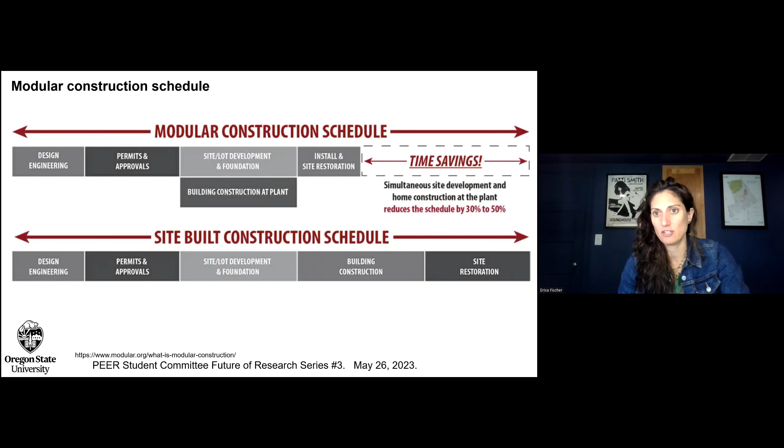And so I'm going to show you a video. This is about a minute. So right after COVID hit Wuhan, China, there was a hospital that was built within about 10 days. And it was built using modular construction. You can begin to see all the modules and the layout here. And so I wanted to show you a time-lapse video of this because I think it's pretty incredible.

When we think about construction in the United States, a lot of you are on university campuses. I'm sure you see buildings that are under construction for years. And then they build a building in 10 days. So, thinking about how we can actually increase the speed of construction and what is possible is kind of remarkable.

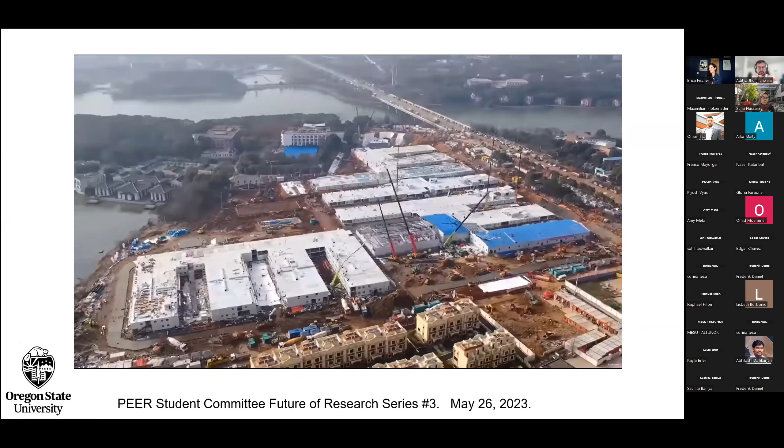Okay, so the music is kind of dramatic. But I'm not saying that all hospitals need to be built in 10 days, but I think what's incredible about this example is to show what is actually possible in our construction. That if we are able to use modular construction for certain applications, we are able to drastically increase construction, and how we could actually solve a lot of our societal problems through that increased speed of construction would be incredible.

But it's not only used for hospitals and for these emergency situations. There are a number of examples of modular buildings that have gone up all over the world, including here on the West Coast in high seismic regions. And so we are starting to see the use of modular construction for hotels, for apartments, for commercial spaces, in order to rapidly build buildings, but also to try it out and see what is the possibility of this new construction.

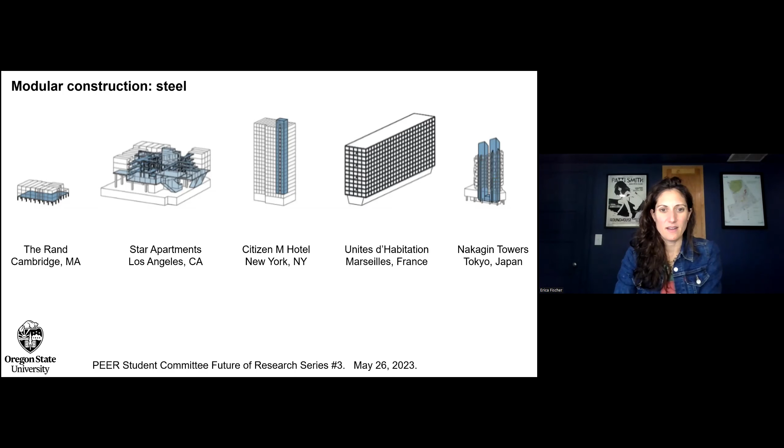The connections themselves were CNC'd offsite, so that everything can be put into place. So there's very little work occurring on the site itself, other than putting everything into place. So the mass timber itself is really primed to be used in this volumetric modular construction.

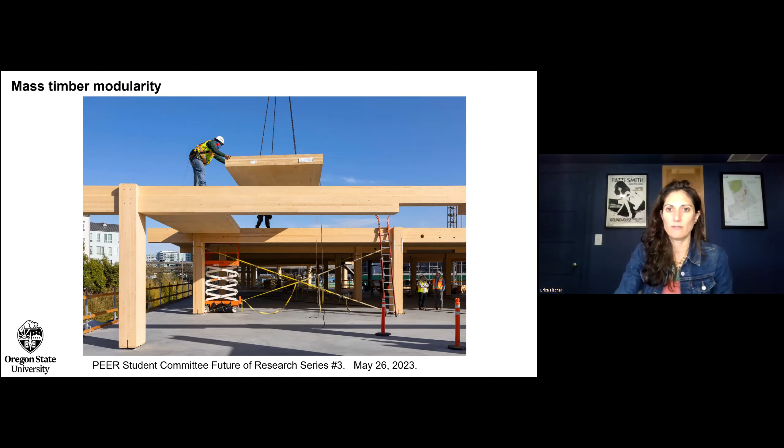and is being used throughout the country for low-rise building construction. But the project I'm about to show you that we've been working on at Oregon State University is focusing on high-rise building construction for modular construction. And so what that looks like is glulam beams and columns, as well as CLT floors. And so the modules themselves have 4 glulam columns with 8 glulam beams, 4 supporting the mass timber panel for the ceiling, and 4 supporting the mass timber panel for the floor.

And these are connected together with kind of an interstitial space between the modules where all of the utilities are run. You can imagine if these are all cubes, you need to punch holes in the walls in order to run utilities through the length of the building. And so that can be problematic if you're using your mass timber walls as lateral systems.

So in this type of configuration, there are two different types of connections. The first are the connections within the module themselves. This is an intra-module connection. And then you have the connection between the modules to connect the modules together to create either a diaphragm system or just to create continuity of load path. And that is called an intermodule connection.

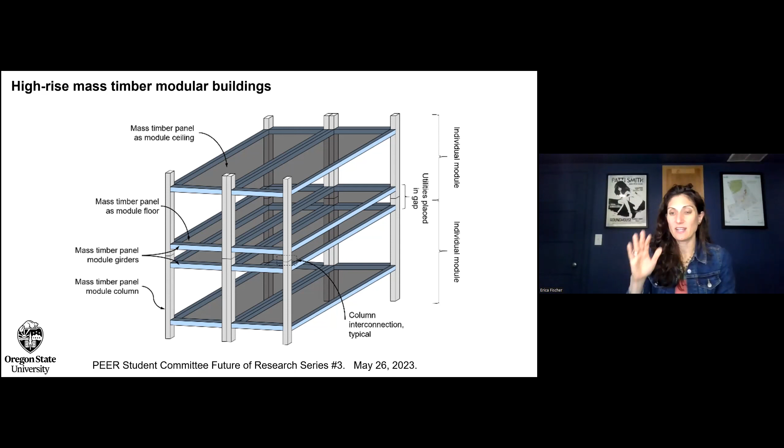And I'm going to focus a lot the rest of the presentation on these intermodule connections that connect module to module, because the behavior of the entire building itself is going to be dependent upon this connection, the stiffness of this connection, how this connection is designed, and it's really the behavior of the whole building in a seismic event.

Okay, so before I start though, I'm going to talk a little bit about what these big research challenges are with modular buildings. And so if we have this type of modular building looking at an elevation, we apply some lateral forces to it. First and foremost, we have to ask ourselves, where are the diaphragms? Are the diaphragms at the floor level? Do the ceilings themselves contribute to that diaphragm action in any capacity?

We have to ask ourselves how the stiffness of the module to module connection, or the intermodule connection, influences the behavior of the building. How does the stiffness influence the drift, the interstory drifts of the building? How does it influence the diaphragm behavior? How does it influence the accelerations that we're seeing at each of the floor levels?

And then lastly, can we use ductility and overstrength factors for regular buildings? Can we take everything we know about the seismic performance of regular buildings and apply it to the seismic performance of modular buildings? And where can we not apply it? Where do we need to develop new knowledge? And where can we take that knowledge and transfer it over?

And so I'm going to talk a bit about the first two questions, because we haven't really begun answering even all of the third question in a project that we're doing at Oregon State University. And this is just one example of a project that is happening. There is modular construction research occurring for low-rise buildings at Oregon State University as well. I'm going to be focusing on high-rise buildings.

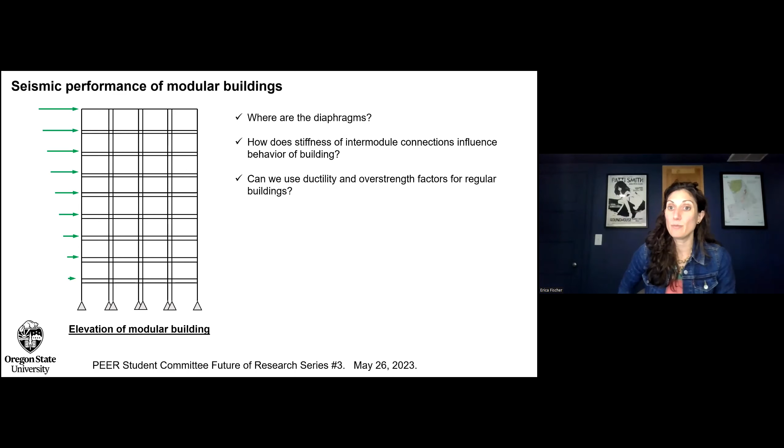And there are a lot of companies throughout the Pacific Northwest that are looking at how to make this feasible, and really mainly focusing on the panelized, kind of shipping crate construction for low-rise construction, because the knowledge is just not there yet for this high-rise construction, and what it looks like to actually have these intermodular connections, what they visually look like, as well as what kind of stiffnesses we need to meet in order to get the global building behavior that we need to meet the building code.

Okay, so I'm going to talk a little bit about the role of intermodular connections and the behavior of modular and mass timber buildings. Again, this is an ongoing project at Oregon State University. We're in the second of 5 years of this project. And I'm going to try to do the work of my graduate student justice. And I'm going to focus today on two points.

The first being the placement of these intermodular connections. Where do we put them? Do we put them at the diaphragm level? Do we put them in the interstitial space? Does that even matter on the global behavior of the building of where we put these connections? And then looking at the stiffness of these connections and how that changes the behavior of the building.

And so for this study, we looked at 3 different case study buildings, and it met the type 4A, type 4B, type 4C construction. And if you have no idea what the words that I'm saying, these are types of buildings out of the International Building Code. So the International Building Code has different types of construction that relate to the building height as well as the material that they're constructed out of. Type 1 and type 2 construction are typically steel and concrete buildings.

They're typically non-combustible buildings. Type 4 buildings used to be one category of type 4 heavy timber building that was 9 stories or 85 feet tall. And with the emergence of the 2021 International Building Code, we saw the expansion of that into these type 4A, type 4B, and type 4C. So you can go all the way up to 18 stories in a mass timber building. That doesn't mean you can go up to 18 stories fully exposed with no fire protection. As you increase in height, you need to add additional fire protection to the building, in terms of gypsum wall board, etc. But you can have a 9-story building that's almost all fully exposed in mass timber.

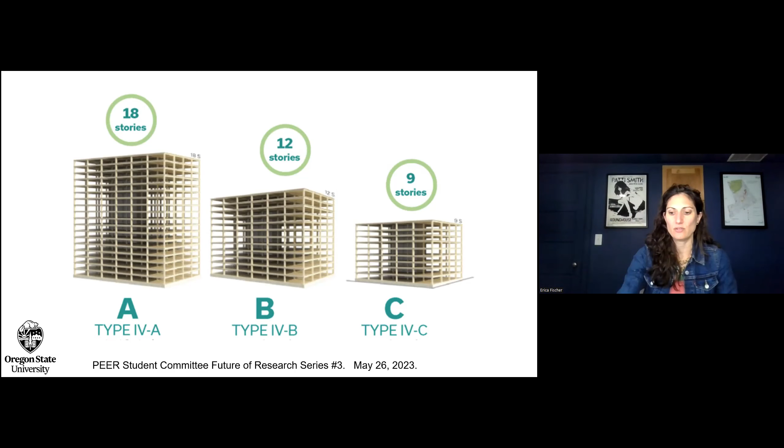And so we wanted these case study buildings to kind of match up with what is in the International Building Code. So throughout my results, I'm going to talk about the 18-story building, 12-story building, and the 9-story building, and this is why we chose those 3 buildings. The floor plan of each building looks like what I'm putting on the screen right here. This is a very similar floor plan to what the Brock Commons building is. That is an 18-story mass timber building with a reinforced concrete shear wall, two cores, similar to what I'm showing here. That is a University of British Columbia dorm.

So perfect example of where you could probably use modular construction, where every single room is basically the same, and you have this very regular pattern of the floor layout from floor to floor to floor. So we used a very similar column grid and core location to kind of mimic that building. We designed these buildings to be located in Seattle, so high seismic region. They have the site class D, risk category 2. The CLT that's on the floor level is all a 5-ply CLT, spruce pine fir.

And then because we actually found that that is where the diaphragm is, it is not at the ceiling level, and the ceiling doesn't really contribute very much to the structural performance, at least that CLT panel does not. But we do need a CLT panel there for stability during transportation. We used a 3-ply ponderosa pine for that CLT panel. The ponderosa pine is a product of forest restoration. So when you're doing wildfire mitigation, particularly in the Pacific Northwest, we are removing a lot of ponderosa pine from the forest.

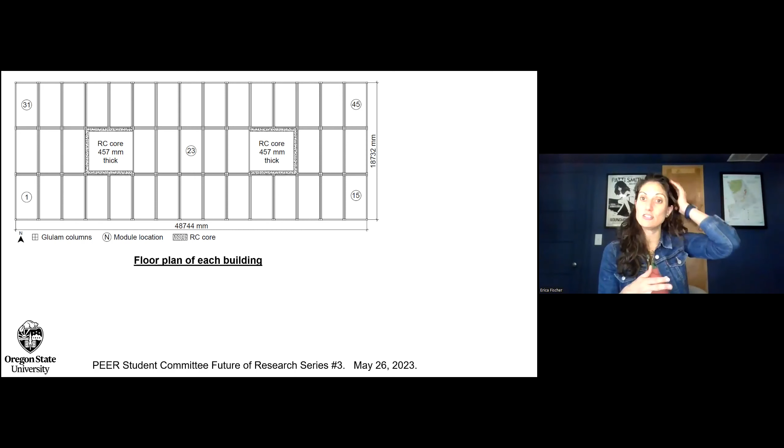And a question that we as an engineering community are having is, can we actually use that? It's a low grade lumber, but can we use it in some sort of capacity so we're not just throwing it in the garbage? And it turns out we can use it in CLT for certain applications, and we're highlighting one of these applications here. In this building, we used 10 pounds per square foot superimposed dead load on every single floor and 50 pounds per square foot live load on every single floor. And all of the building components were modeled using elastic uniaxial materials, and I'll get to the reasons for that in a little bit.

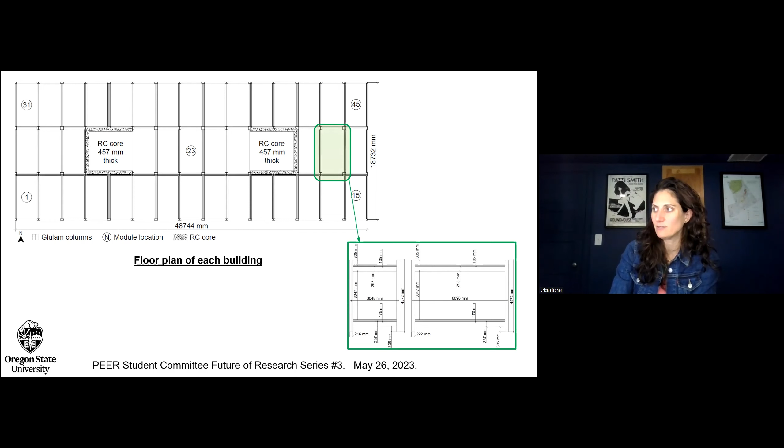Each of the individual modules can look like this, as I'm showing here, with dimensions, and these were designed for gravity loads as well as for seismic loads using the equivalent lateral force procedure, and then checked for forces using our OpenSees model. And so what the connections look like is that they are 2-node zero-length elements. So I'm not really showing them as zero length here, but they are zero length.

And so we looked at what happens when we actually put the connection at the diaphragm level. So this is when the connection's at the floor beam and diaphragm level. And then what happens when we put them in the interstitial space? What happens when we put that connection at the intersection of the columns itself? And how does that influence the global behavior of the building, right?

So if we're going to design these module-to-module connections, where do we put the connection? And how do we choose that location such that we're minimizing forces in the connection, we're efficiently designing the building such that we're using less material than we have to?

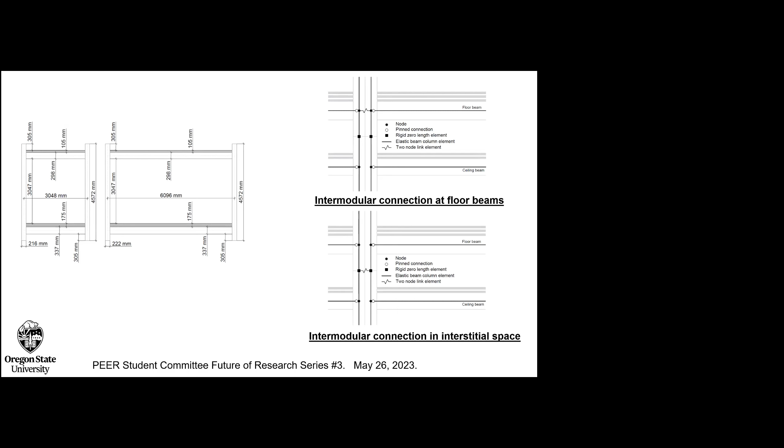Each module itself was designed and modeled such that each individual diaphragm in the module was assigned a rigid diaphragm constraint. But then we looked at what would happen to the full floor diaphragm by putting the two-node link elements at these different locations, and then by also changing that translational degree of freedom stiffness, how does that change the definition of the diaphragm itself in terms of rigid, semi-rigid, or flexible?

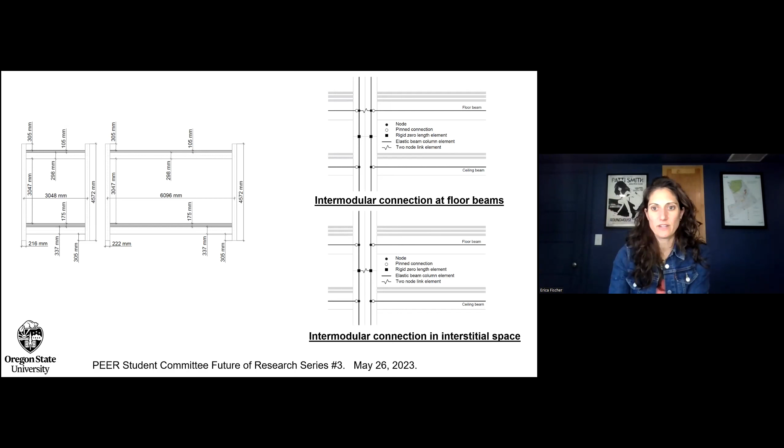Okay, so what we found, I'm going to go through some of the results. First and foremost, we found that there are smaller interstory drifts. So when we actually put the connection at the floor beam level, at that diaphragm level, we saw that there are less interstory drifts than at that intersection of where the columns meet one another. We also saw that the location of the maximum interstory drift changed.

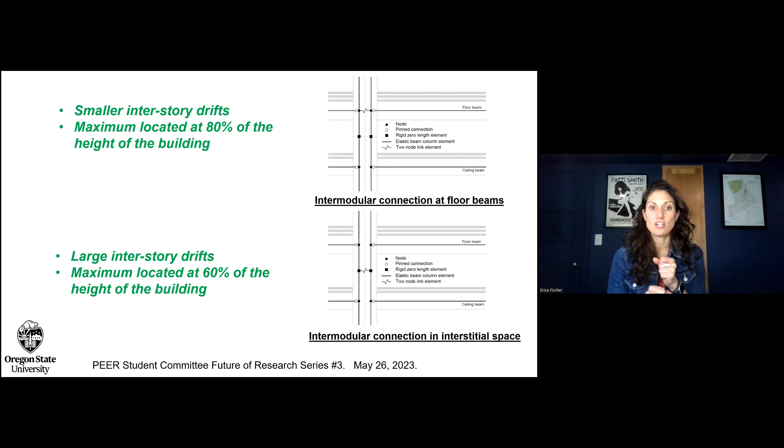In all of the buildings, all of the interstory drifts were below 1.5%. So they definitely met code requirements. And our reinforced concrete shear walls were actually designed to limit the drift of the building. But we are beginning to see that intermodular connections and their location can actually influence the global behavior of the building.

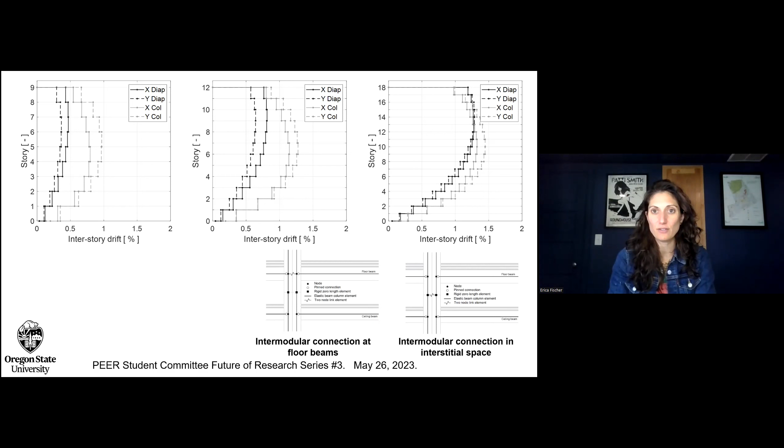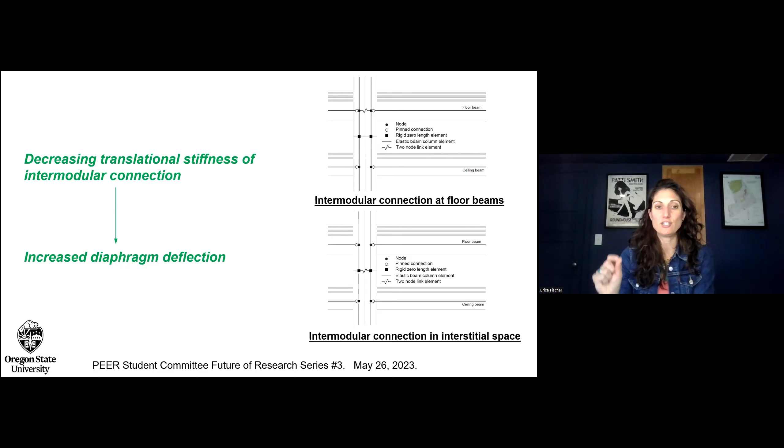Okay, so if we want to begin changing the stiffness of the intermodular connection: as we begin to decrease the stiffness, we begin to increase the diaphragm deflection, which would make sense. We begin to see that the floor level behaves more like a flexible diaphragm as we decrease the translational stiffness of these connections. And that's regardless of where we put these connections, whether in that interstitial space between the two column locations, or at the diaphragm level.

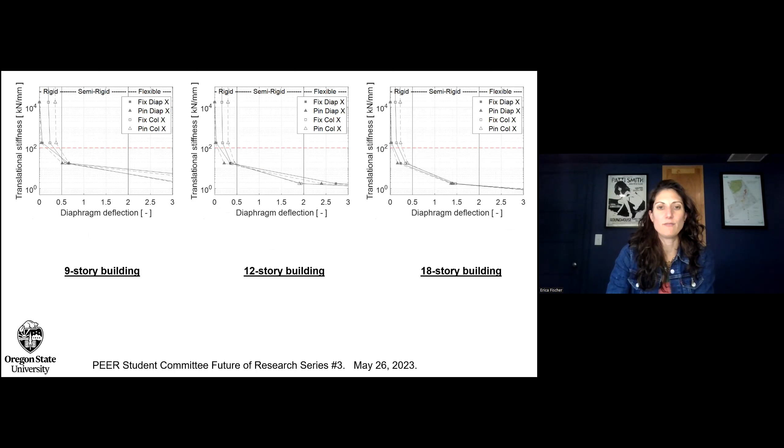And so as we continue to look at different metrics, we also looked at what happens if we change the rotational stiffness, and we really don't see much difference if we are changing the rotational stiffness here. What I'm showing you here is pinned versus fixed rotational stiffness, so allowing infinite rotation versus allowing no rotation. And we can see that the lines are pretty much the same.

We don't see as much of a difference between these two as we might in some of the other plots that I've shown you here, where we've seen a large impact on the behavior of the building. So in general, we continue to see that as we are decreasing the translational stiffness of the connection, we are increasing the diaphragm deflection, and the diaphragm is behaving more like a flexible diaphragm.

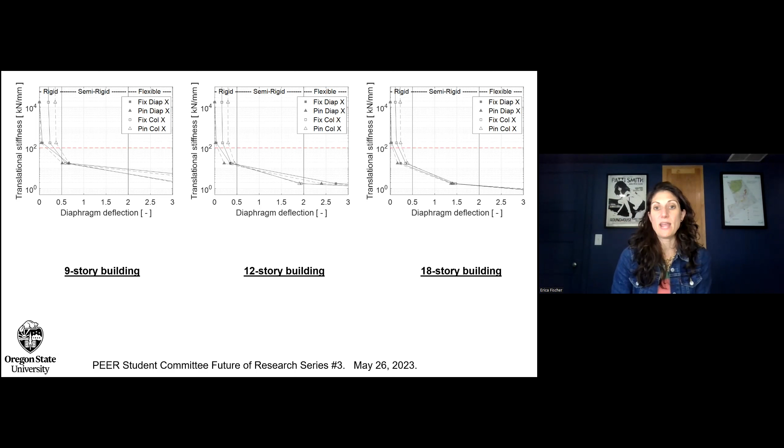So again, thinking holistically, how are we designing this building? Do we want the building to have a short period? We're seeing less of a pronounced difference in this 18-story building because it's an 18-story building, but in low-rise buildings, we're going to see more of an impact of that translational stiffness on the global behavior of the building.

How do we want our diaphragms to behave? Do we want them to be behaving more like flexible diaphragms? Do we want a longer period to get out of that plateau phase and have less seismic demands on the structure itself? So intentionally designing our building and carrying that through into our module-to-module connections, so that we can use our materials intentionally and efficiently.

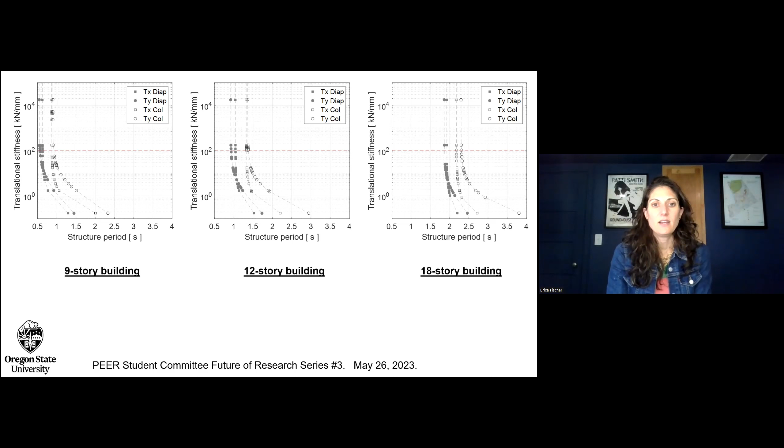So to summarize some of the conclusions: decreasing the translational stiffness in the intermodule connections is going to increase the diaphragm deflection and the building period, regardless of where we put the connection and regardless of the height of the building. We found that the rotational degree of freedom of the intermodule connection has very little impact on the global behavior of the building. We saw better building performance when the intermodule connection was located at the diaphragm level rather than in the interstitial space at the column joints.

And the reason we looked at that interstitial space is that's where steel module connections are located, and how everything connects together. So we were really basing things off of steel building performance. But what we're finding is maybe that's not really the location the connection needs to occur at. Maybe it needs to happen closer to the diaphragm, and we just have simple column-to-column connections that ensure continuity of load path.